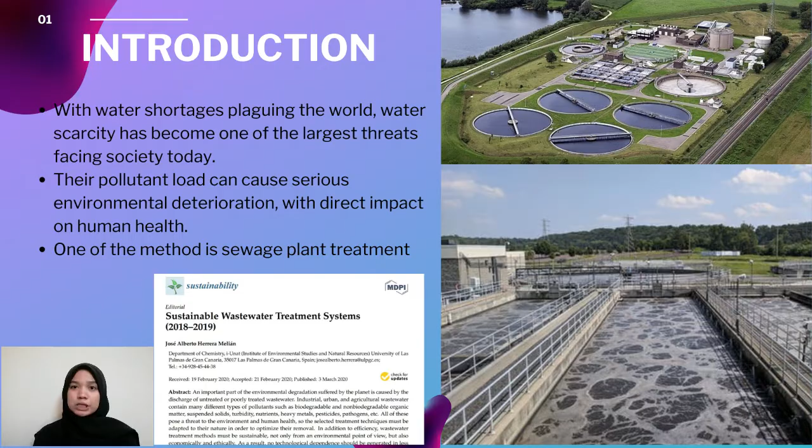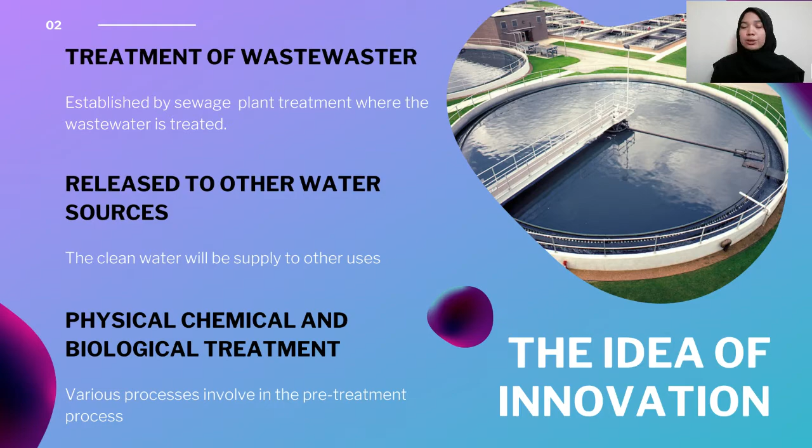One of the methods to treat wastewater is by using a sewage treatment plant. Cities and towns have several systems in place to carry the wastewater from our homes, hotels, factories, and other establishments. The idea of innovation begins with wastewater going to the sewage treatment plant where it is treated, then deemed safe to release into other water resources. It goes through different stages where the wastewater is treated to remove physical, chemical, and biological contaminants present in it.

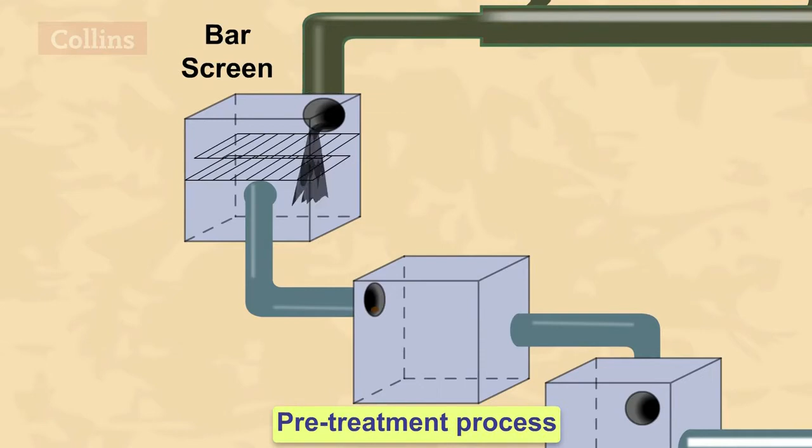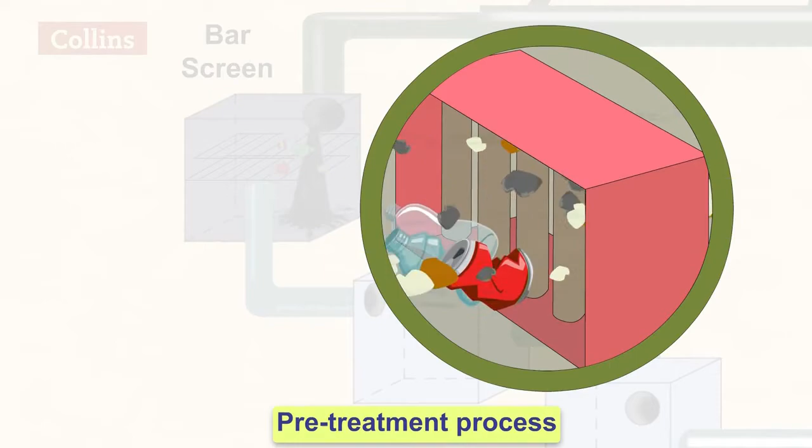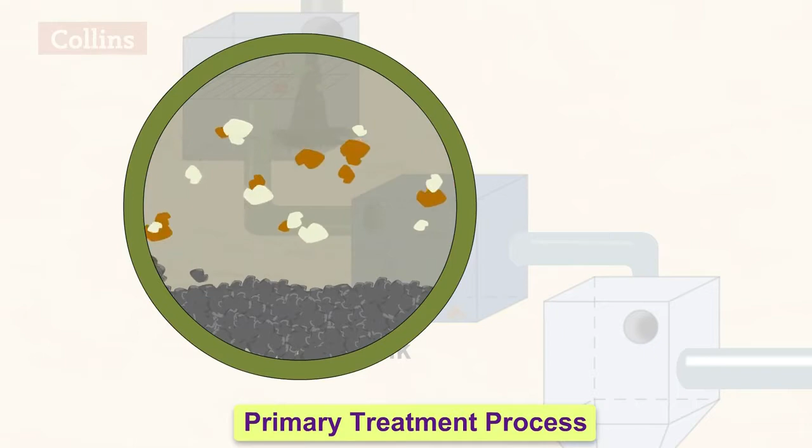The pre-treatment involves the sewage being sent through grids which remove solid waste such as metal cans, plastics, and papers. In the primary treatment process, the sewage flows to the grit chamber very slowly so that the sand, pebbles and soil settle down at the bottom. The sewage flows into a settling tank or sedimentation tank where solid waste like feces are allowed to settle down, while waste such as soaps, oil and grease rise to the top of the wastewater.

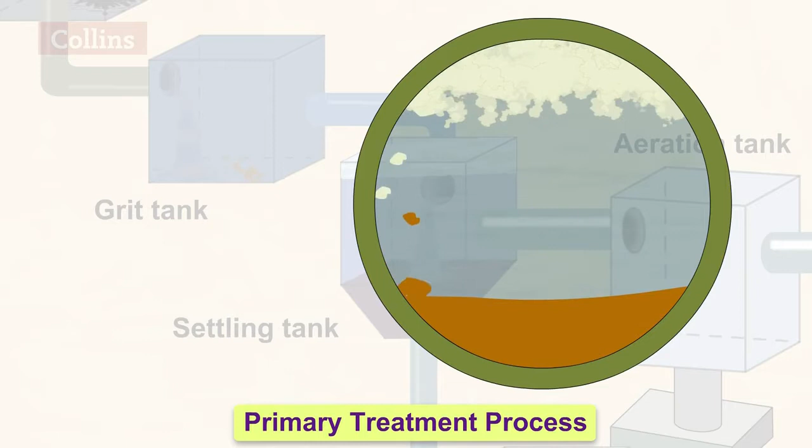The waste at the bottom is called sludge, while the floatable waste is called scum. The water left out is then called clarified water.

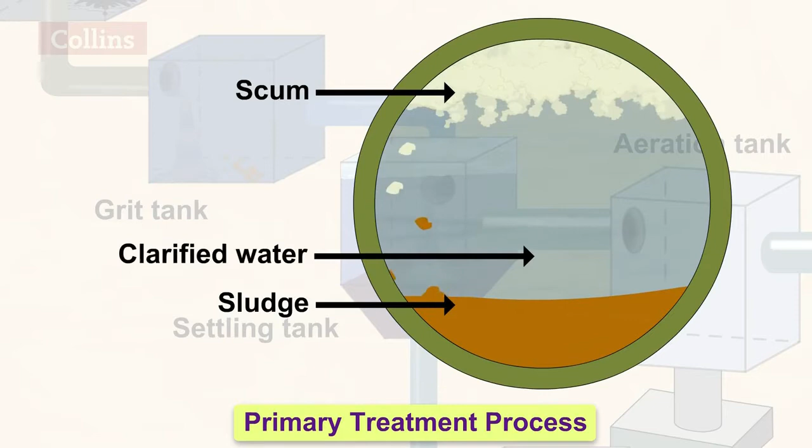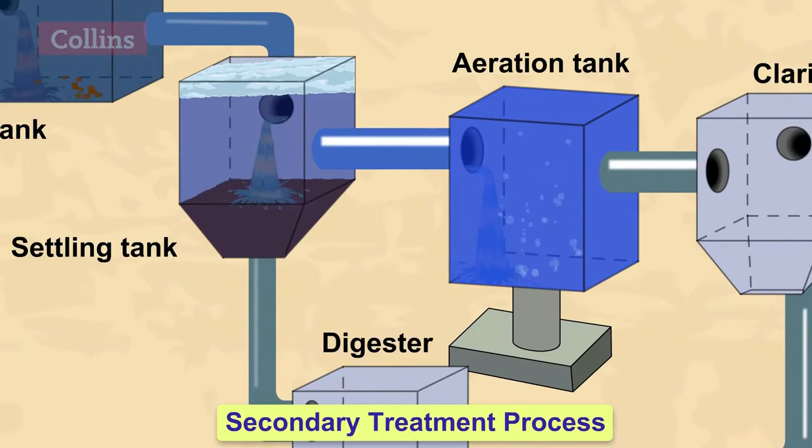In the secondary treatment process, biological or organic waste are removed in an aeration tank called a biological process, where air blowers bubble air. The air bubbles in the aeration tanks help the aerobic bacteria to grow and fix organic contaminants such as food waste, feces and other organisms.

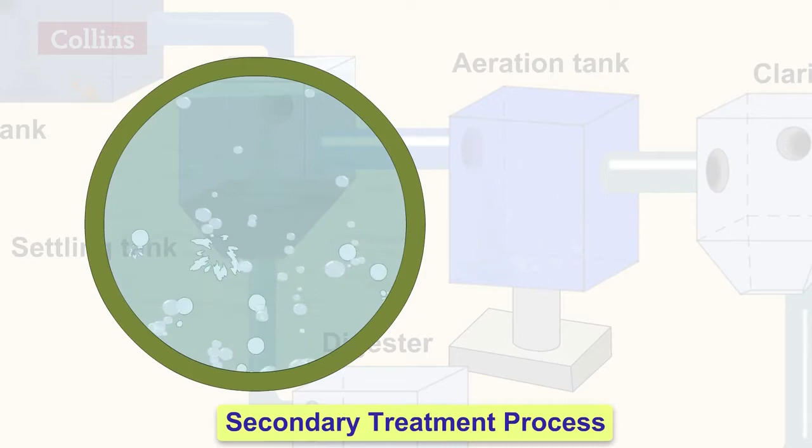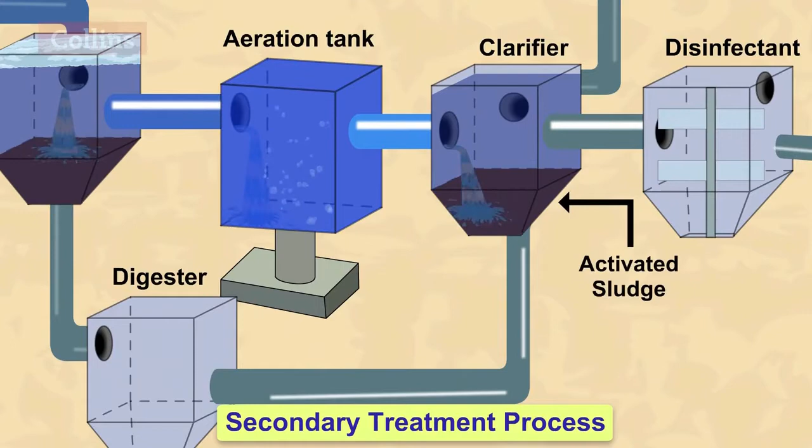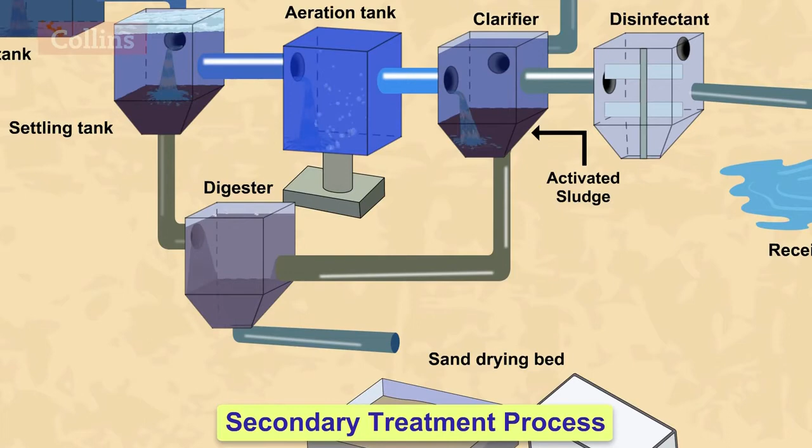Then the mixture flows into a clarifier where the activated sludge settles out by gravity. The activated sludge produced, along with the sludge produced in the primary process, is transferred into a digester where it is decomposed by anaerobic bacteria. Biogas is produced in this process, which can be used as fuel or to produce electricity.

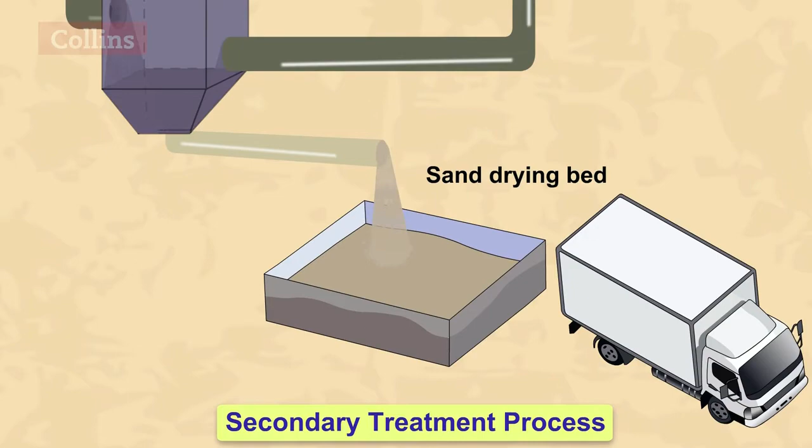The activated sludge is then left in the sand drying bed to dry. The remaining material can be used as fertilizer or compost in agriculture sectors. In the tertiary treatment process, the leftover wastewater is treated with chlorine to remove phosphorus compounds, nitrogen compounds, and bacteria to produce clean water.

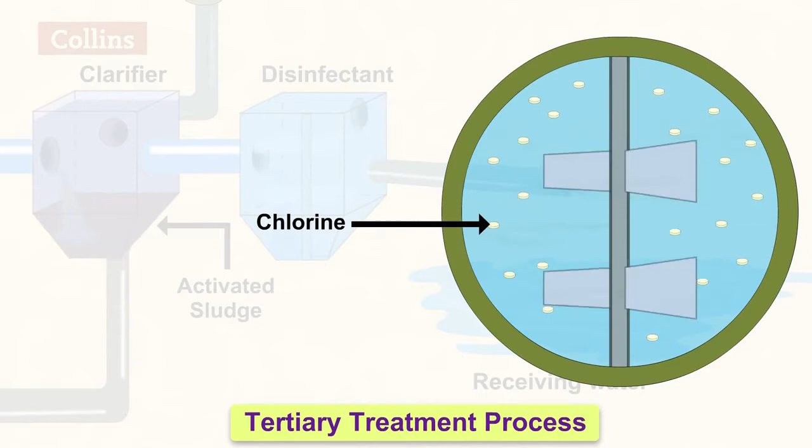Clean water is one of the most important natural resources on the planet. However, wastewater contains many harmful substances and cannot be released back into the environment until it is treated. With the technology of sewage treatment plants, it will give benefit in restoring the water supply. The government in turn reduces the health risk associated with environmental pollution and reduces the water loss induced through water pollution. Energy production can also be produced.

The gas produced during this anaerobic digestion process contains a large amount of methane, which is harvested and then burned to generate electricity. This energy can be used to power the wastewater treatment plants, making them self-sustainable. Thus, it helps lower the reliance on non-renewable energy sources such as fossil fuel, reducing a country's carbon footprint and country's expenditure on energy production.

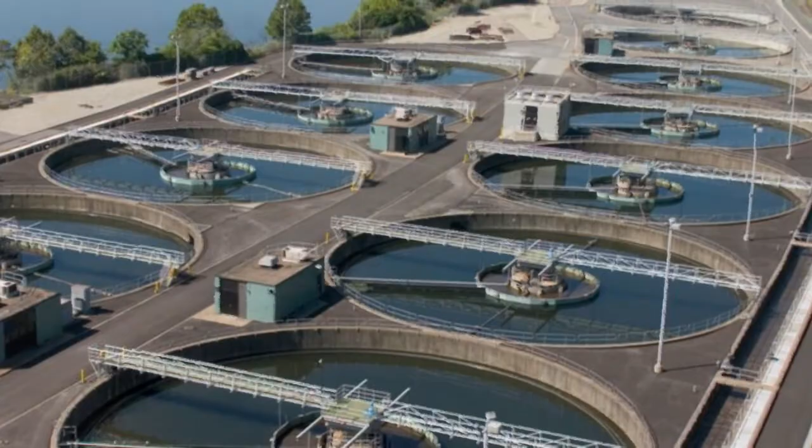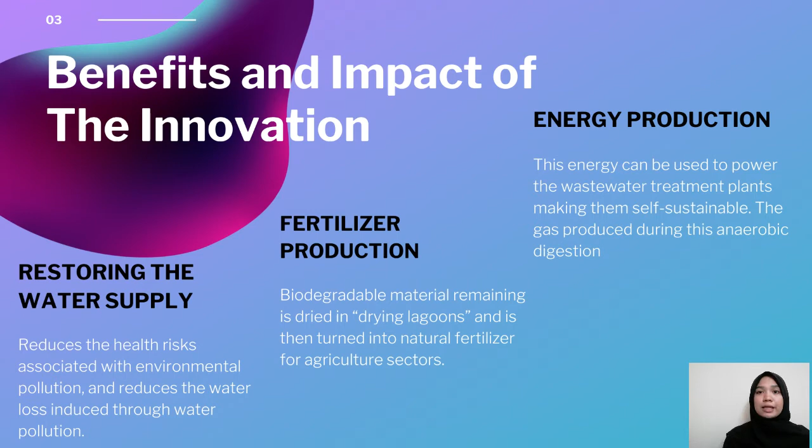Lastly is fertilizer production. Any biodegradable material remaining is dried in drying lagoons and then turned into natural fertilizer. The resulting natural fertilizer is then used in the agriculture sector, increasing crop yields. This decreases the use of chemical fertilizer that pollutes the surrounding marine and surface ecosystem.

In summary, the combination of these benefits along with water production makes wastewater treatment a sustainable short and long-term solution to the world's water crisis, which will only increase as the world population increases. Wastewater, properly treated, is a source of water for many purposes. Good wastewater treatments allow the maximum amount of water to be reused instead of going to waste. Thus, wastewater treatment is fundamental to protecting the health of many different ecosystems.